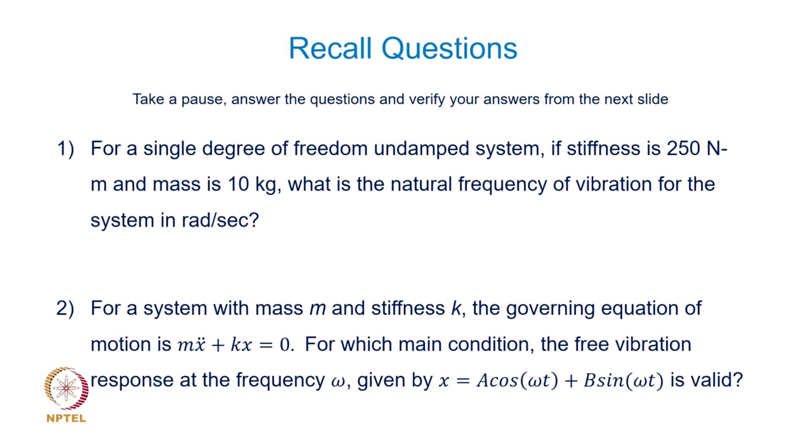So for the single degree of freedom system, in the undamped vibration case, we have seen that the response is obtained by an expression which we derived as x of t equal to capital X cos omega n t minus phi i.

This capital X, we have seen, is a function of the initial conditions that we impose. That is, supposing you have a simple spring mass system, damping being ignored, we are having stiffness and mass as the two elements of the vibratory system. Now, from its mean equilibrium position, if we disturb this with either initial displacement x naught or initial velocity v naught, that is the velocity given to the inertial mass at t equal to 0, that is how we define initial displacement and initial velocity.

And then after t more than 0, that means these conditions are imposed exactly at t equal to 0, and after that there is no external stimulus to the system, and the system is allowed to vibrate on its own once this initial disturbance is imposed. Now, as we see here, the amplitude of the response is given by an expression which is a function of the initial conditions, that is x naught and v naught, and of course omega n embodies the properties of the system, k and m.

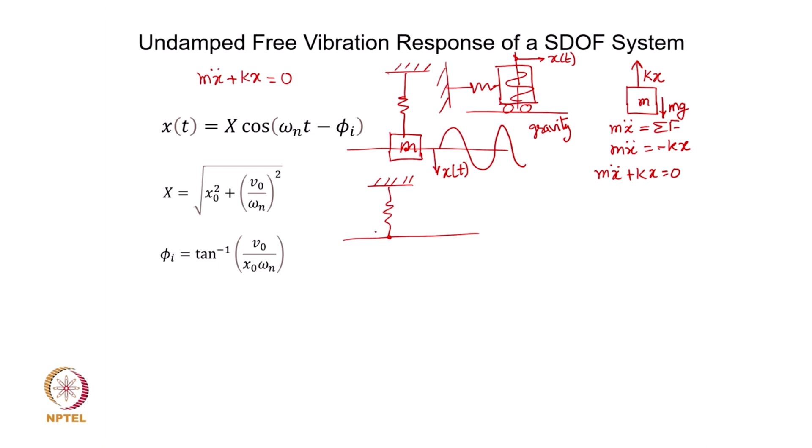for this reason, that supposing the spring is just hanging like this without the mass being attached, and this is your position of the end of the spring. Now if you attach this mass to the spring, because of the weight of the mass, the spring gets stretched, and the new position of this mass is going to be here the moment the mass is attached. This deflection, all of us are aware, is the static deflection, or the deflection when the mass is not moving, it is gently put or gently connected to the end of the spring, and the mass simply pushes down, and during that motion the gravity is acting on the spring and the spring gets stretched.

So the delta is the displacement or stretch in the spring due to gravity loading. All right, so if you measure the displacements with this initial position of the spring just before the mass is attached to the spring, if this is considered as your x of t, then obviously you will have to include the gravity as an additional force.

But if we attach the mass and the mass slides to this position, and the gravity being a constant force, it is going to settle down at a particular position delta from this equilibrium, from this particular initial reference point, then the mass is going to be stationary at this point. And afterwards when we apply these initial conditions to the mean equilibrium position of this mass, then the mass is going to oscillate. So suppose we describe this motion beyond or about this new equilibrium position of the spring mass system.

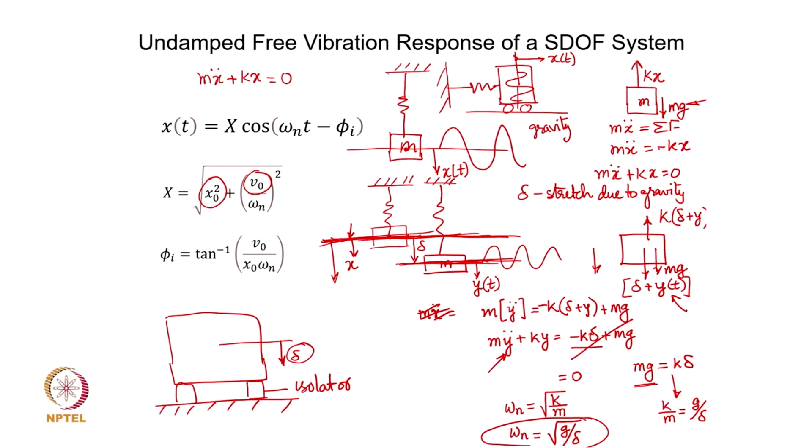Okay. Now, so we have discussed this part, amplitude and frequency of vibration. Amplitude is constant, which is very important to note, when the system does not have damping, when it is perturbed with some initial displacement or initial conditions, it continues to vibrate without any change in its amplitude. This amplitude remains the same as what it is at t is equal to 0. So, no dissipation in the system, and therefore, the energy at each cycle is the same, and therefore, the amplitude remains the same throughout.

Okay. Of course, it is a hypothetical case, because we know that even if there is no formal damping mechanism like a dashpot in the system, there will always be some means of dissipation. The simplest is that unless you put the vibratory system in a vacuum, there will be aerodynamic damping. Okay. There will be friction in the material of the spring or any structural member which is vibrating. So, that would create a reduction in the amplitude over time. So, as we progress, that is something which we will discuss shortly.

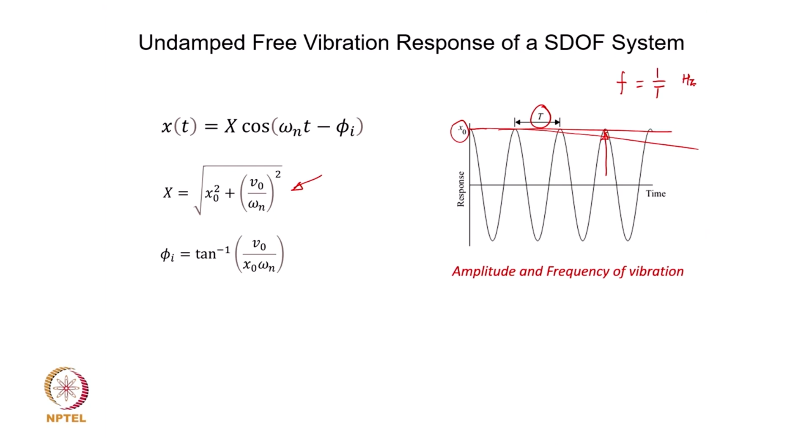Okay. And what we saw is, if this is the amplitude which is a function of these initial conditions, the frequency, which is the inverse of this time, frequency in terms of cycles per second, is 1 over T. So, in practice, this is a common unit of frequency of vibration, cycles per second or hertz, that is 1 over the time period of oscillation.

Before we look into the damped vibration case, let us take an example of a simple vibratory system. The job is to find the natural frequency of the system. This is a rectangular beam fixed in the wall, and at the end of this beam you have a hoisting drum, as you can notice in the side view. That drum is lowering a mass, or it may be lifting a load from the ground, and we are supposed to explore this system for its natural period of vibration.

How would you model this? If you recollect, our entire vibration analysis process's first step is to convert this physical system into a corresponding vibratory system. So a simplified model has to be built before we analyze the system. It looks apparently complicated to figure out how to convert this into a vibratory model, and as I've been saying, that first step is really the most critical and challenging, but it becomes easier as we go along and solve many problems.

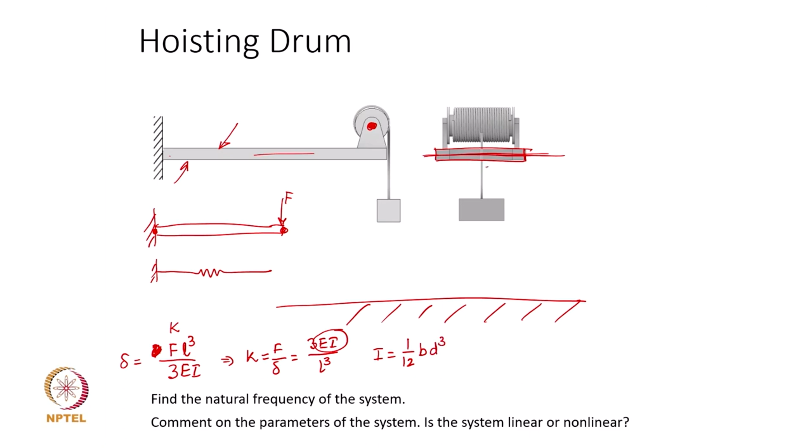Based on the flexural rigidity of the system, E is the Young's modulus, I is the area moment of inertia, and because the cantilever is bending about this axis, we take the area moment of inertia of that rectangle as 1 over 12 B d cubed, where B is the width of the cross section and D is the thickness. It is all straightforward to find the stiffness of this structural member. L is the length of this cantilever.

Once that is done, we basically get the numeric value of the parameter of the vibratory system, the stiffness K. But that is not the only system here. You have a winch, sort of a pulley, which is lowering the mass. The mass itself is quite substantial, in the sense that we may have to again make assumptions. It is all about making assumptions and capturing the system in its simplified vibratory form.

Another assumption I make here is that I will treat this pulley as massless. We shall look at what happens if this pulley is not considered massless, since it is actually not massless, but compared to the mass being lowered, if the mass of the pulley is say 100 kgs and the mass being lowered is say 1000 kgs, then as a first approximation we may consider it massless. So the mass of the pulley is relatively small compared to the mass being lowered.

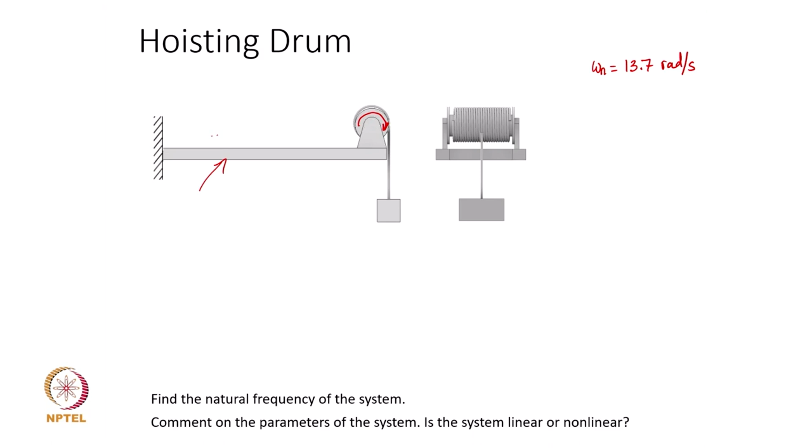Please make a note that this drum may be rotating however slow it is, and that rotation is going to create excitation to this system. This entire system is vibrating. So if this motion and the associated fluctuating force, because of unbalance or whatever other excitation function it generates, will create excitation to this entire system, you have to always look into the operation of the system and whether the excitation frequency omega is anyway related or close to this natural frequency which I am calculating.

It may turn out that it may not be exactly matching, but even if it is close enough, it would create a lot of problems in terms of larger deflections rather than the simple lowering operation that you find here.

If this winch is operating, or the motor is operating, if this winch is connected with a gearbox, and if the gearbox is operating at a higher speed that matches the natural frequency of this entire system, you should make sure that you adjust the parameters of this vibratory system, maybe make this thicker, reduce the length if possible. Making changes to the cross section of this beam is going to be much easier; sometimes the mass may not be easy to change.

So all the time when you get this response, or the vibration features, or vibration characteristics in terms of either its response or natural frequencies, this is something which we should immediately start looking at: how do I make use of this output in terms of better design of the system?

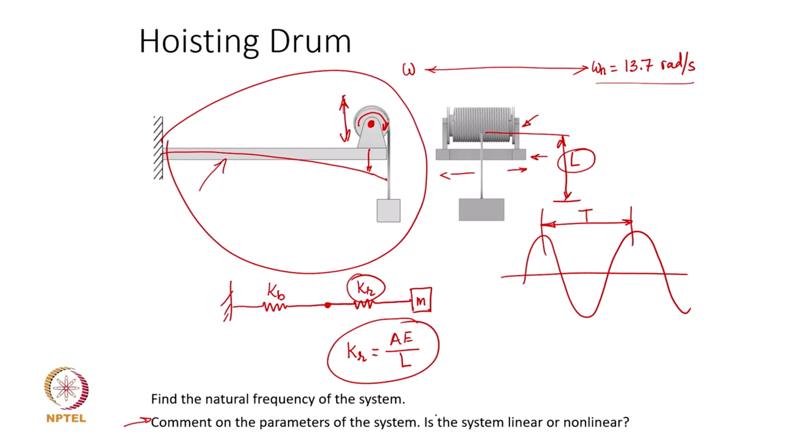The only question is, when your oscillations are happening, if this length is changing fast enough compared to the time of oscillation, then only the system parameter can be considered to be changing continuously. But supposing this is moving way too slow, which typically is the case. If it is moving very slowly and your oscillations are maybe 10 or 20 oscillations already in that period of moving up, then you can treat the system to have constant parameters like K and M.

Mass of course is constant, but supposing this mass is being lowered or raised, the mass of course is constant most of the time. But if the mass being lifted up or lowered moves fast, then you may have to think whether the constant K assumption is valid, or typically I expect the movement of this mass during lowering and lifting is reasonably slow.

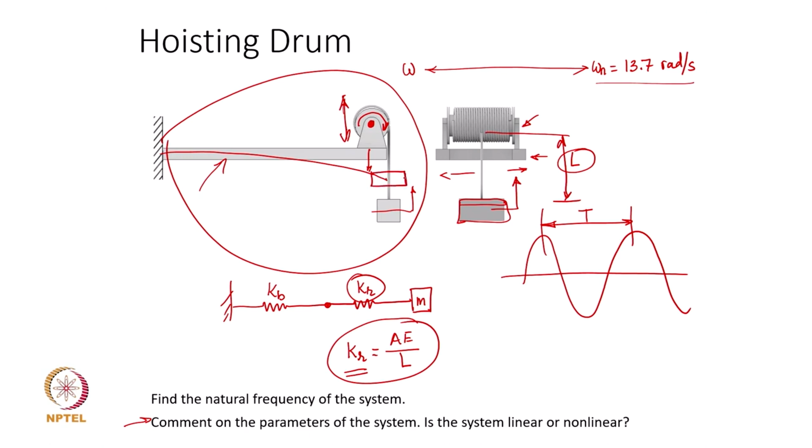So that the K can be presumed constant, but do make a note that the natural frequency you obtain when the mass is completely at the top, or when the mass is completely close to the ground, those two natural frequencies can be different, because the lengths of the rope will be different.

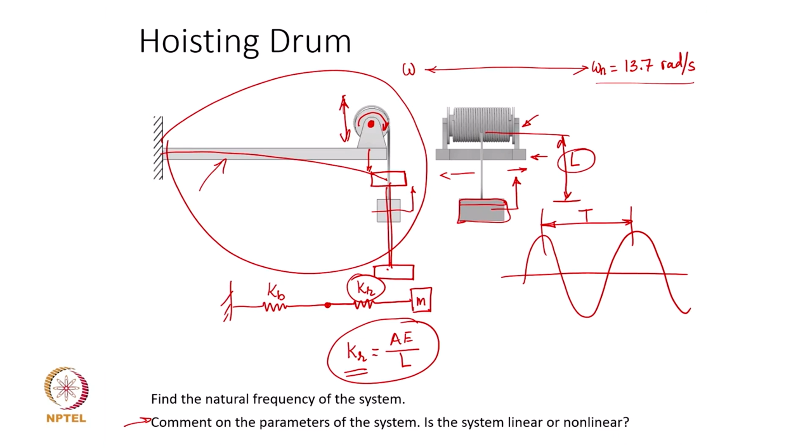Let us take another example here: solar panels of a spacecraft. These solar panels can be seen on the circumference, and 4 of them are situated at equal angles as you see here. The panel dimensions are all given here, and their density is known.

So basically you can use this as a mass element, and they are attached at the end of this cylindrical aluminum rod. In an actual case, of course, you will not have them as rods, but they may be this kind of shape - you can have a look at some of these solar panels which are used. For the sake of an example, we assume it is a simple aluminum rod. If that shape is different, you can find out from your solid models what the stiffness of such a structure is. But assuming there is an aluminum rod here at the end of which this panel is mounted, and these rods are connected to the body of the spacecraft.

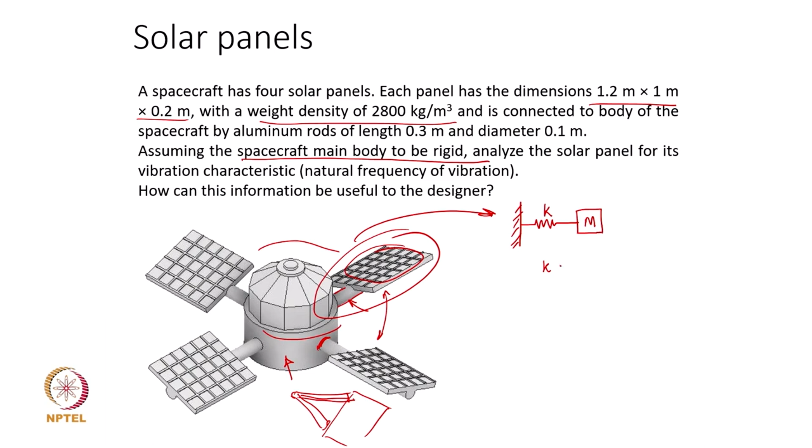Now, how do you find K? M of course is very simple - you have dimensions given, volume multiplied by density will give you the mass. What about K? How do I find K? Just like in the previous example, this can be treated like a cantilever. It is a circular member, and I can find it using this expression - you can refer to strength of materials for the expression, which is 3EI by L cube. EI is the flexural rigidity of the circular shaped cantilever, L is the length. So again there are some issues here - what L shall I consider? Shall I consider only up to this point, or shall I take it from the center, and so on? There will be assumptions involved in this case as well.

The deflection beyond this point is not going to be strictly the deflection of a cylindrical piece. So this L will be only up to this point, and then I can assume that this mass is completely at this location. This will generate values slightly off from the actual value, but this is the first cut natural frequency we can get. We can make it more complex, but as a simple vibratory system I can take this L to be the length of the cylindrical part. The mass, of course, you can find from the dimensions, and I use that mass to find the natural frequency.

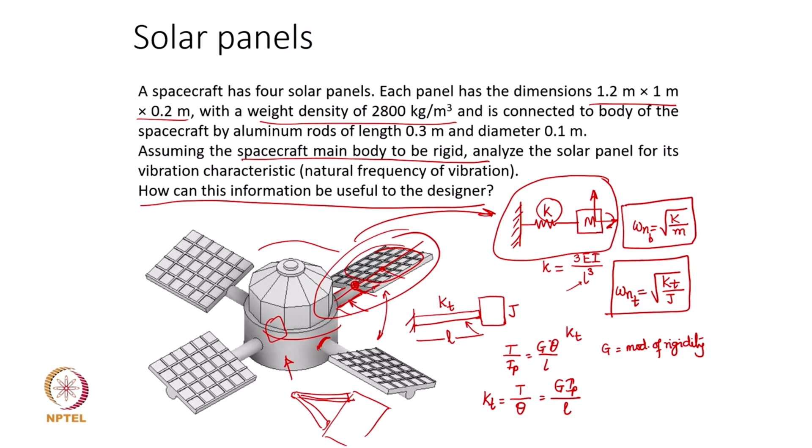Is that clear? I hope this is fine. So, this is another example that I have taken for finding out the basic natural frequency expression. The next example now focuses on the response to initial disturbance.

We have not seen or taken an example where the system is disturbed at t equal to 0. Of course, take your time to read through the example. Essentially, it says you have an overhead travelling crane, which you see in many factories and workshops. You have an overhead crane supported at both ends, with walls on both sides, and in the workshop, if you want to lift certain things from the floor, the overhead travelling crane does that job for you.

This horizontal frame is assumed to be rigid enough, and there is a motorized system here which uses the same kind of winch we have seen in previous cases. We do not care at the moment how the load gets lifted up and down. What is important is how to convert this entire physical system into a simplified vibratory model.

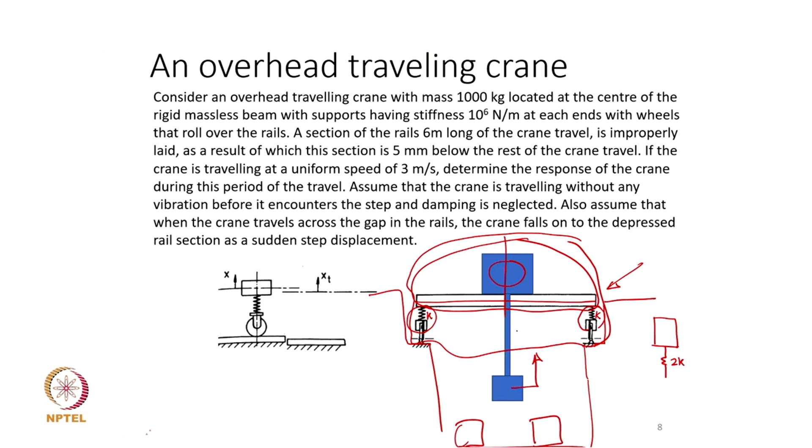So what we are doing is converting this physical system of the overhead crane as a mass, and that mass is sitting over a spring. This spring has twice the stiffness of the individual suspension springs, and the wheels are rolling over rails which you can see here. These rails are on the platform, and they will be laid on a foundation.

Now, the example involved is that a section of the rail, 6 meters long, of the crane travel is improperly laid. As a result, this section is 5 millimeters below the rest of the crane travel. That means the crane is travelling along, and suddenly a 6 meter long rail is improperly laid, and it gets shifted down by a small step of 0.005 meters, or 5 millimeters.

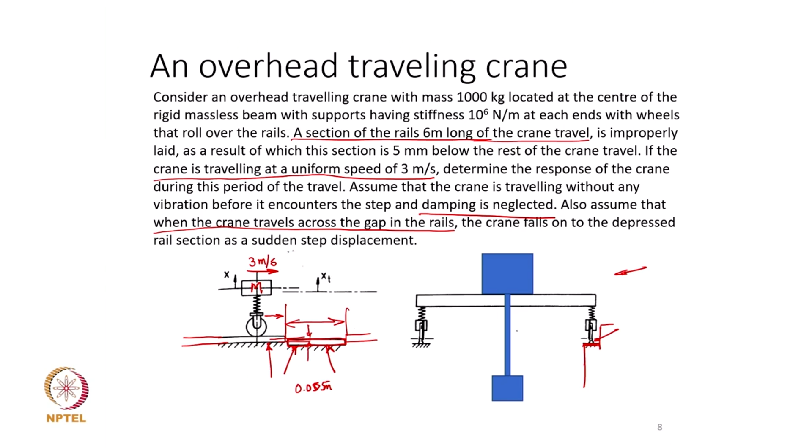Now, there are a few assumptions involved. First, damping is neglected, so we can treat this as a simple spring-mass system with no damper. The important assumption is that when the crane shifts from one rail section to the depressed one, the wheel suddenly goes down. That means the crane falls onto the depressed rail section as a sudden step displacement. The wheel does not simply bounce down gradually; the movement of the wheel happens all of a sudden, from one point to the other.

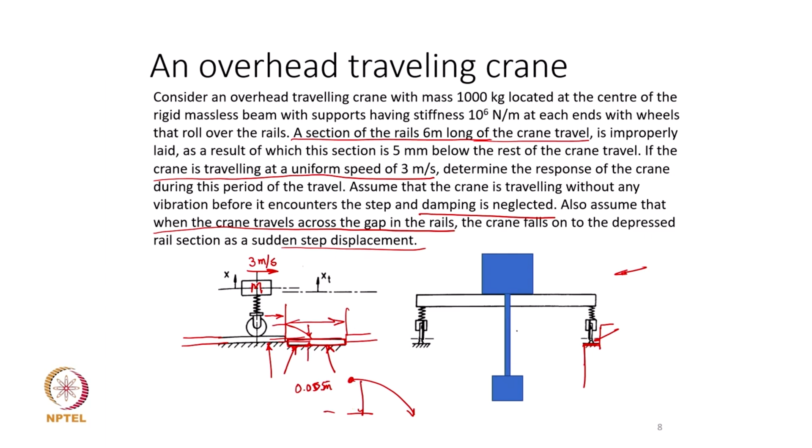So let us look at this example: the initial mean position of the crane is here, and as it travels and encounters this sudden jump, the wheel immediately takes this new position, but the mass continues to travel along its original line, since it cannot simply follow the wheel. The wheel is just touching the bottom part of this rail. Now, over this 6 meter long travel of the crane, what will be the mean position of this?

Will the mean position be here? No, the mean position is going to be somewhere here, slightly lower. That lower mean position has to be the same as the dip in the rail. So that dip in the rail is let us say 5 millimeters. So the new mean position is going to be 5 millimeters below the original mean position of the travelling crane.

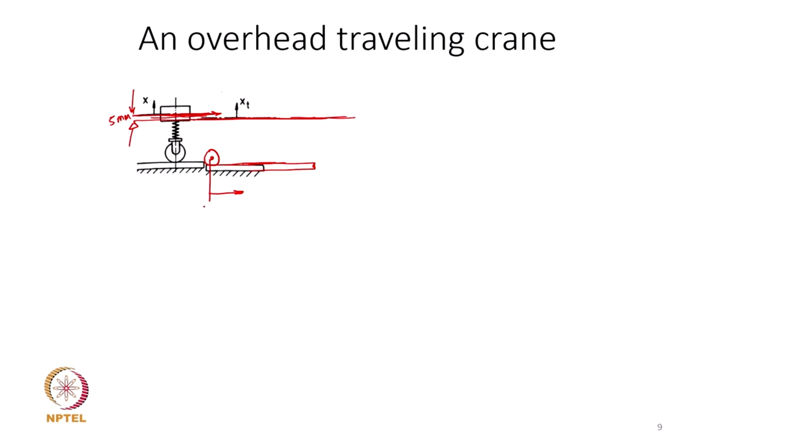Now what we have to do is start looking at the vibratory response, assuming that the position at this point is going to be at t equal to 0. And from this point onwards, how will the crane oscillate and what will be the amplitude of oscillation of that crane?

What will be the expression of that response? We know that response to initial disturbance is X cos(omega n t minus phi I), where capital X equals square root of x naught squared plus (v naught by omega n) squared. These expressions we have already derived, and phi I equals tan inverse of v naught upon omega n x naught.

Now, when you start the motion at t equal to 0, when it suddenly dips and goes over this depressed rail section, what are these initial conditions?

I am going to assume the response about the new mean equilibrium position as x of t, and x is taken as positive upwards, let us say. What will be x naught and what will be v naught?

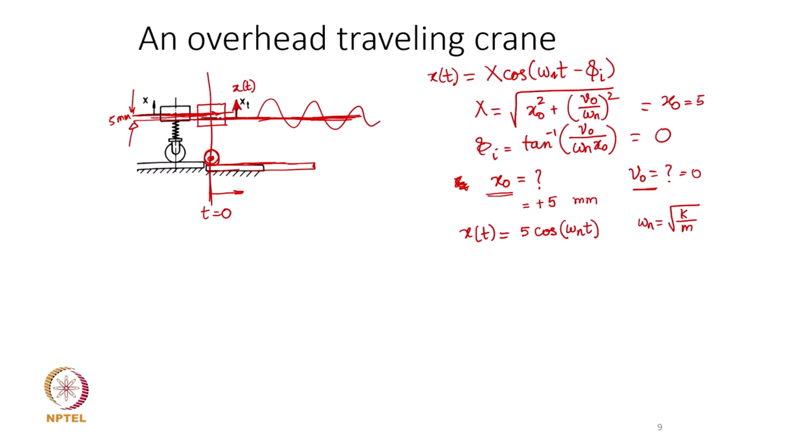So this response is with which the crane is going to move the moment it encounters that depressed rail section. So obviously 5 cos(omega n t), please make a note that it is a cosine term.

So this is the usual position. So from here, the cosine function is going to be looking like that. It will start at t equal to 0 with 5 millimeter amplitude, and then subsequent oscillations will happen at its mean equilibrium position. And the frequency of these oscillations is going to be omega n, which you can find from the stiffness and mass properties of the crane.

Suppose as an extension to this problem, suppose the next rail section after 6 meters of travel is back to its original level, and I am interested now to find out what is the response in this section. What would I do?

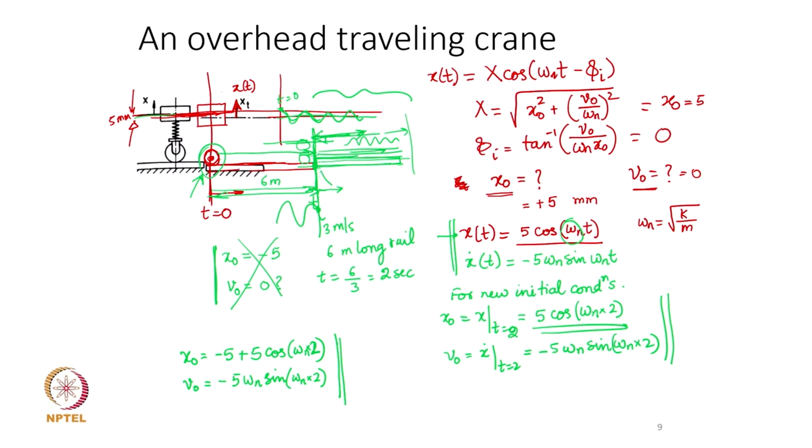Here is the summary of our lecture number 4. What we discussed is the undamped free vibration response to initial disturbance. The initial disturbance we are talking about is the initial displacement or initial velocity imparted to the simple single degree of freedom system at t is equal to 0, and on subjected to those initial conditions, what is the ensuing vibration response is what we discussed. We took some practical examples based on these concepts, and I hope this particular part is clear to you.